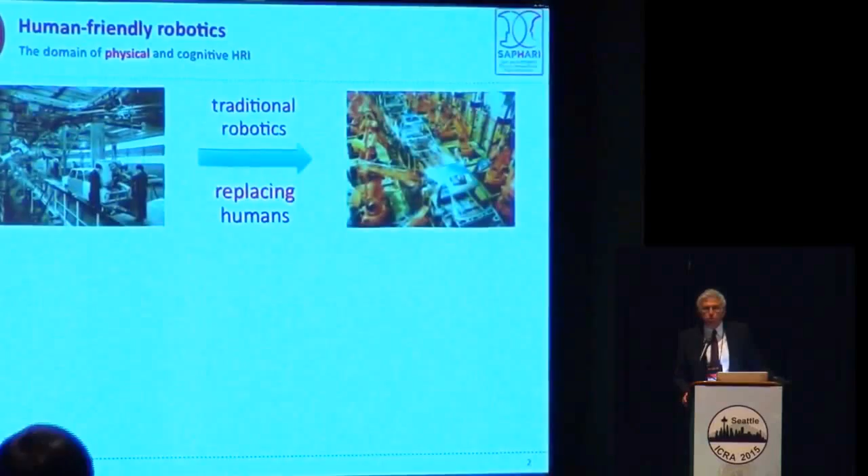So we want to move away from traditional robotics, that used to replace humans with robots, to the situation where humans and robots will collaborate. And this is going to happen, and it's happening already now, both in the industrial setting, so we talk about co-workers, and in homes, or in other service robotics applications, both professional and entertainment. So this is the context, and in particular, we are interested in the physical aspect of this human-robot interaction.

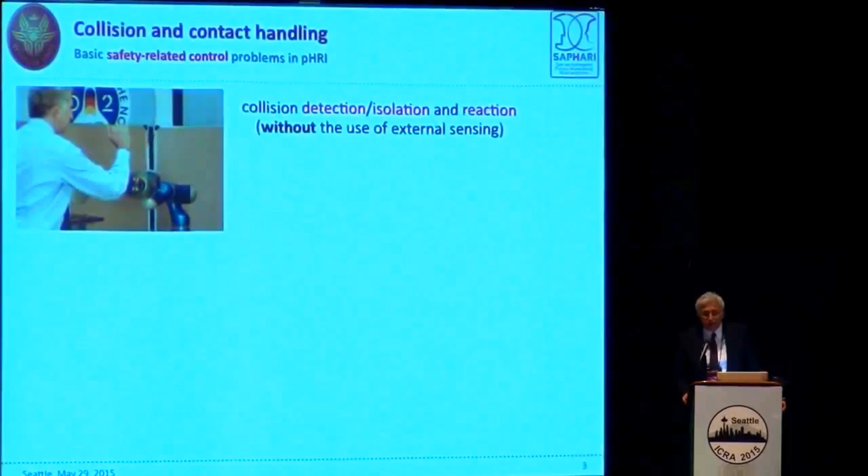Of course, the cognitive aspect is as important, maybe even more, but without the physical aspect, you won't go farther. So my background is in robot control, so I present here a few control problems which are safety related and which are important in human-robot interaction.

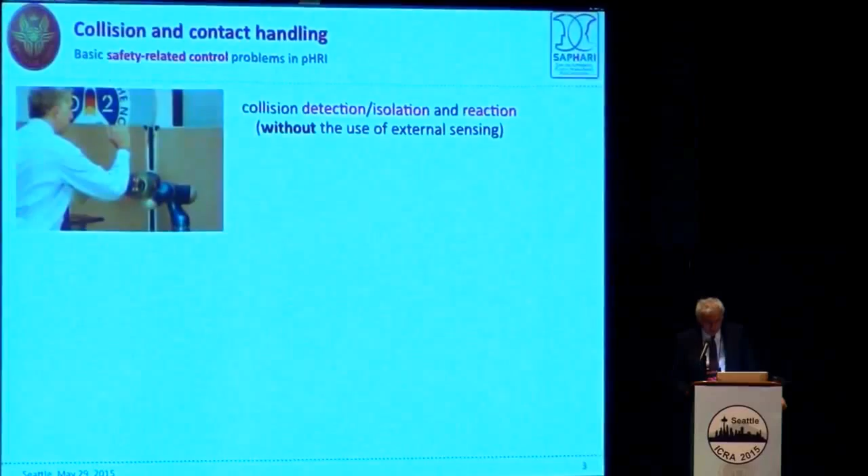In particular, the handling of contact, which may be harmful, so they become collision, and how do you detect collision, and how you isolate this collision, and what the robot should do in reaction to that. And possibly I will present some solutions that do not require any external sensing. They just can be implemented based on the robot's own proprioceptive sensing.

Of course, this is kind of the last event when a collision occurs, so you would like to have collision avoidance continuously, permanently, whatever the robot is doing, and this will allow the task to run despite the fact that the human entered the workspace.

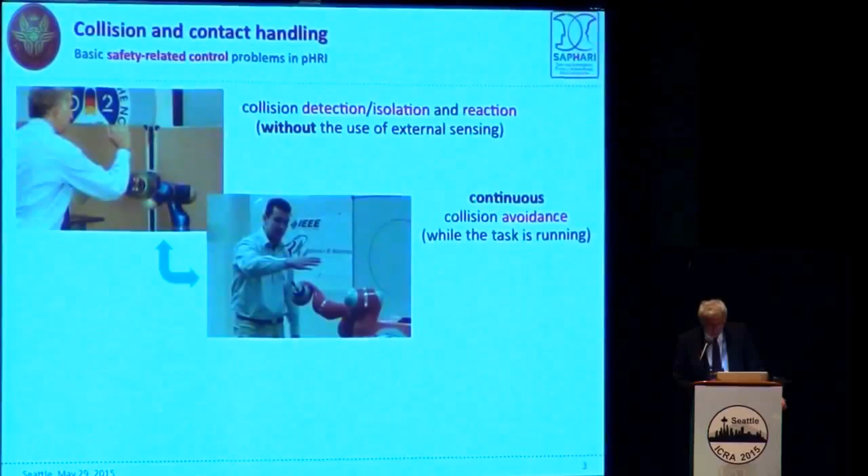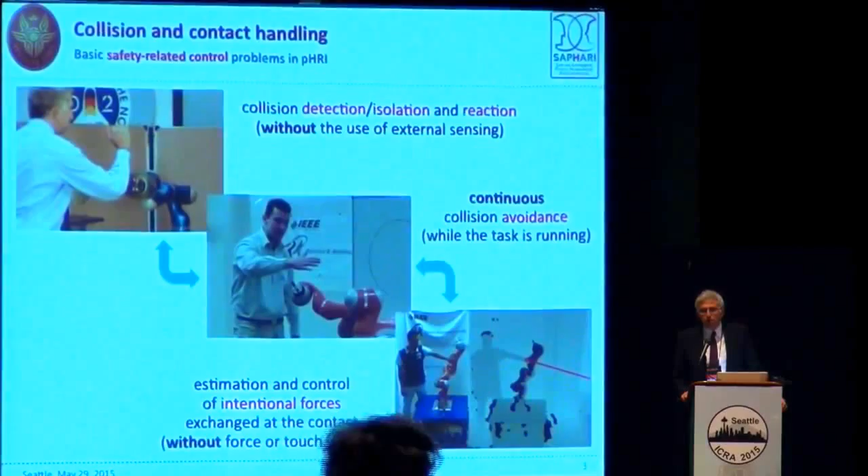There is another situation which is relevant, namely when this collision becomes intentional contact because human and robot would like to collaborate. So instead of escaping possible contact, the robot should look for contact with the human, understanding which parts should go into contact and how you handle this interaction at the physical level.

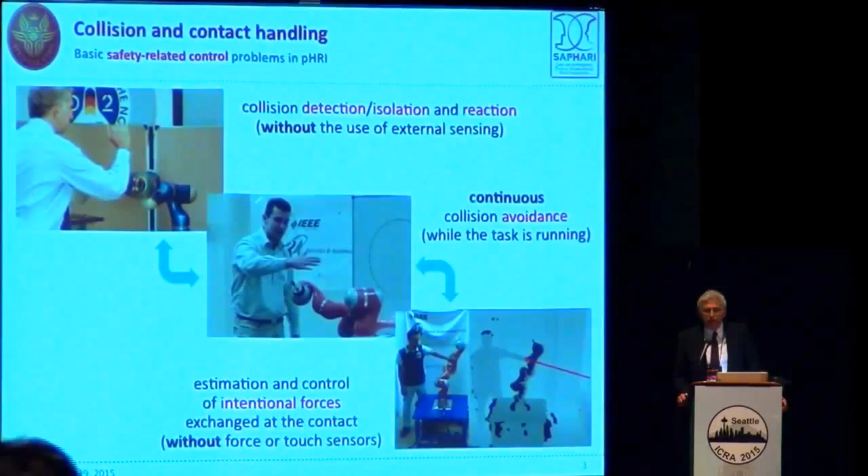And possibly, since this contact may occur at any place along the structure of the robot, like in whole arm manipulation, then you would like to rely not on a specific sensor like tactile sensor, proximity sensor, or force torque sensor, if possible.

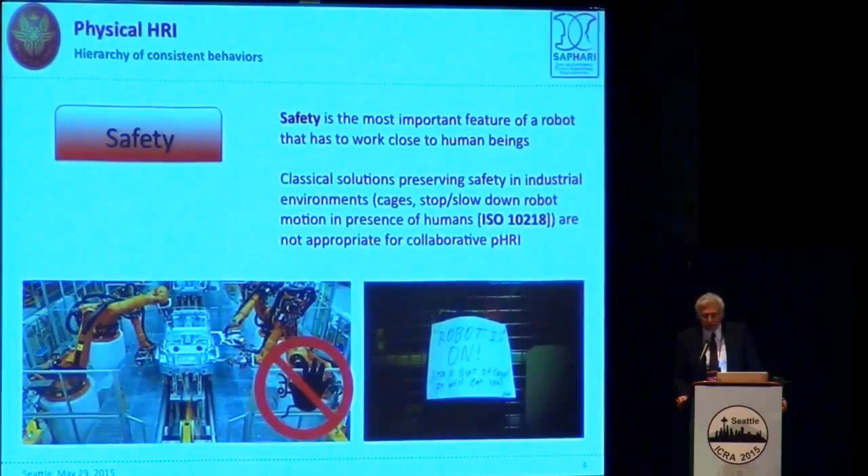So in this respect, these basic problems correspond to three layers of control architecture that we have been developing over the last three to four years. The lowest layer is safety, in the sense of physical contact, so detecting collision and reacting to collision. Of course, this includes mechanical redesign of the robot, which should be compliant, possibly at the joints, maybe with soft coverage, lightweight links, and all this mechanical part. From the control point of view, you build upon this mechanical and electronic advancement to design a safe strategy, and this is the lowest layer of our architecture.

Coexistence, we call coexistence the fact that the human and the robot are sharing their workspace. Of course, this is the most interesting part right now, but you don't have to forget about safety, because a coexistence without safety makes no sense. So safety is always present. On top of that, like in a subsumption architecture, you have these coexistence capabilities that you have to guarantee.

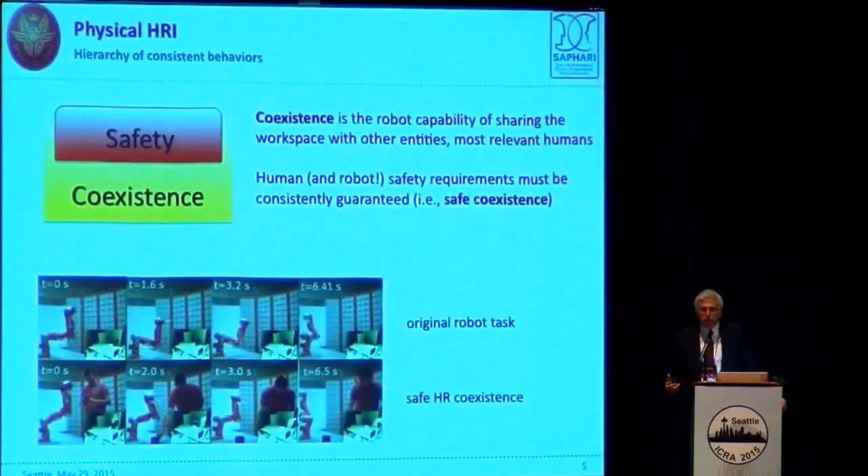Finally, collaboration. This is the highest level of this hierarchical control structure. You can collaborate in several ways. Of course, we are interested in collaboration which is physical, not contactless. Of course, you can exchange information with the robot by voice, by gesture, and so on, but even pushing in selected places the robot to let it change operation or task.

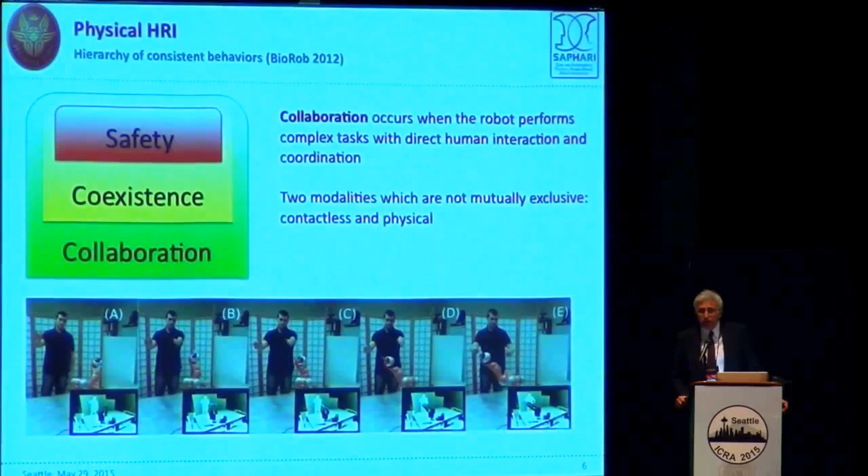And again, collaboration is important, but collaboration should coexist with the fact that other parts of the robot do not collide with the human, except for the selected arm or hand or whatever part of the human body. And if everything fails, the safety layer is also always there. So in this sense, I will present some solutions for each of these layers, and some examples through videos that show how they coordinate and what they represent in terms of robot behavior.

So suppose that we want to do collision handling. We start with planning a motion to prevent this collision. Then we execute the motion and use feedback to control and avoid, in real time, online collision. But if something fails, if the human is too fast for the robot or some unexpected motion occurs, you may collide, and so you want to detect collision. You have to distinguish if this is intentional or not, and in that case, you have to react or replan the structure.

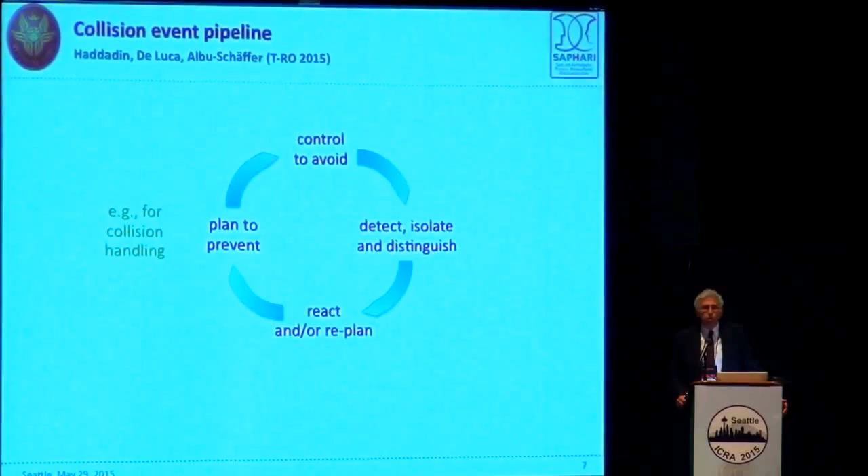So the following slide concerns this aspect. For the collision event, we developed, after a few years, a pipeline which goes from detecting a collision—saying yes or no, there is a collision or contact—to isolating a collision, which means locating the link where the collision has occurred, and possibly also the position of this contact point. Identification means reconstructing the joint torque which is caused by this collision, and eventually also the Cartesian force in this contact. This terminology comes from the literature on fault diagnosis, so it's fault detection, isolation, identification, and in fact our solution sees a collision like a fault occurring to our system.

And then you can also classify which type of contact it has been: accidental, intentional, or if it's severe. Of course, this metrology of collision is very important. And finally, react as fast as possible and in the most intelligent way.

The simplest reaction you can think of is to stop the robot, and in fact, in modern lightweight robots like KUKA or ABB or even Baxter, this is the standard reaction, actually the only reaction. In fact, in order to react in a different way, for instance to avoid that the robot collides with you and stops against your body, you would like to be more comfortable with the robot going away. In order to do this, you have to know which part of the robot has collided, so you need to have also isolation, and not just detection.

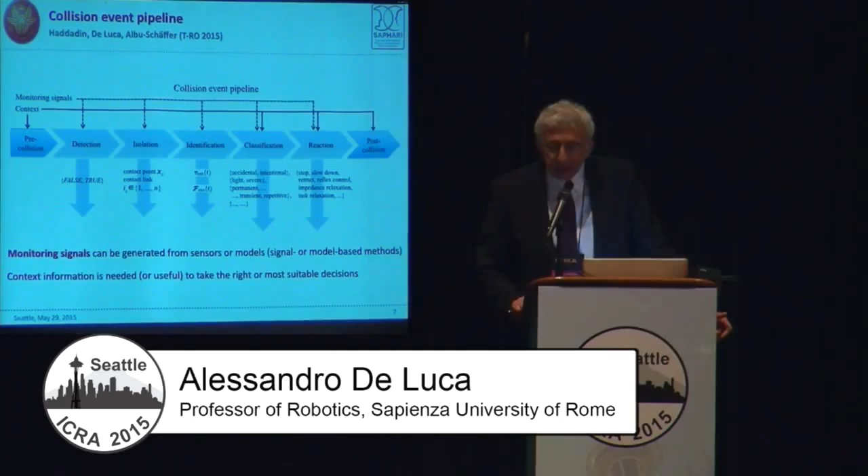For doing this task, we use monitoring signals. Most of them are physically motivated, like tracking the total energy or the momentum of the system. And of course, if you have additional context information, you may take the best decision to proceed after you have classified your type of contact.

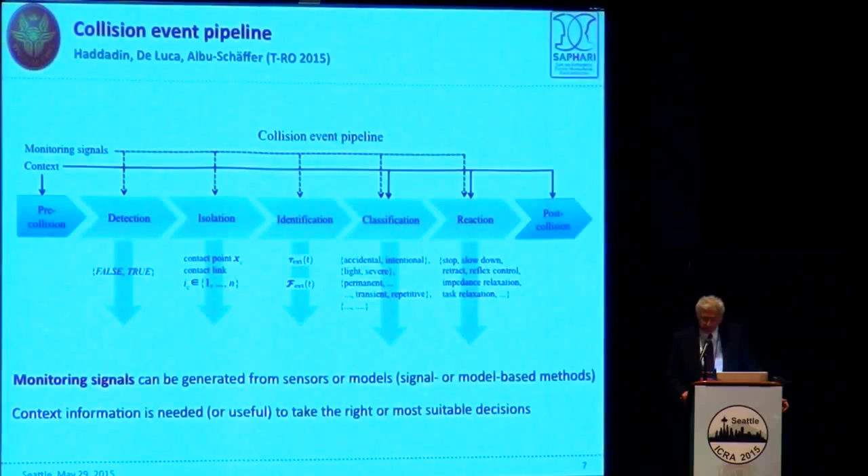So this is a general architecture where we monitor collision, and we may generate different monitoring signals, for instance a scalar signal sigma for detection, or a vector signal which has the same dimension as the joint space or command space of your robot. If one of these signals goes above some threshold, then you recognize that a collision has occurred. And of course, you would like to do this without external sensing or contact information.

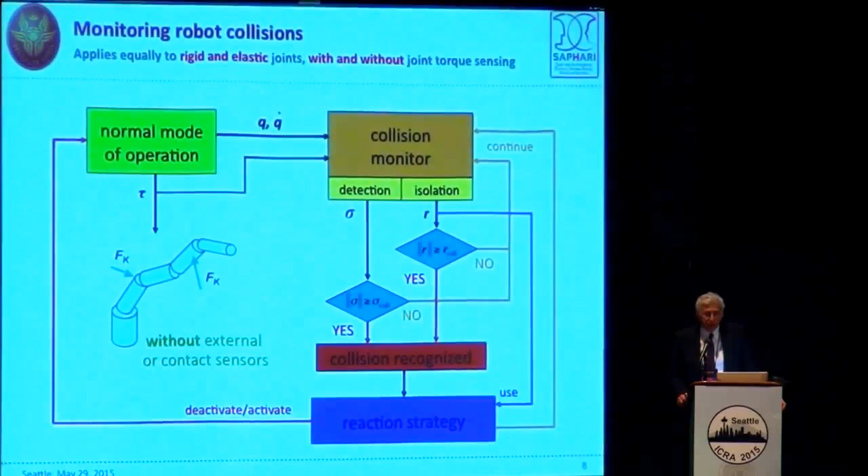Once you have recognized the collision, you want to react, so you deactivate whatever the robot was doing, and try to find some safe reactive motion. Of course, the nice thing about this structure is that the monitor is always on. So while you're reacting to a first collision, you're ready to detect even a further collision, and so on. So while in our analysis we consider one collision at a time, in fact we can handle multiple collisions, successive and so on.

So this is an application of this. I promise that this is the only slide with some equations. This is based on our method on vector residual, which applies both to rigid robots, where you don't have joint sensors, or robots which have compliance, even variable compliance joints - in case you have a joint sensor, you may take advantage of it. And this was the solution that we implemented back in 2005 and 2006 on the DLR lightweight robot while I was on sabbatical at Oberpfaffenhofen near Munich.

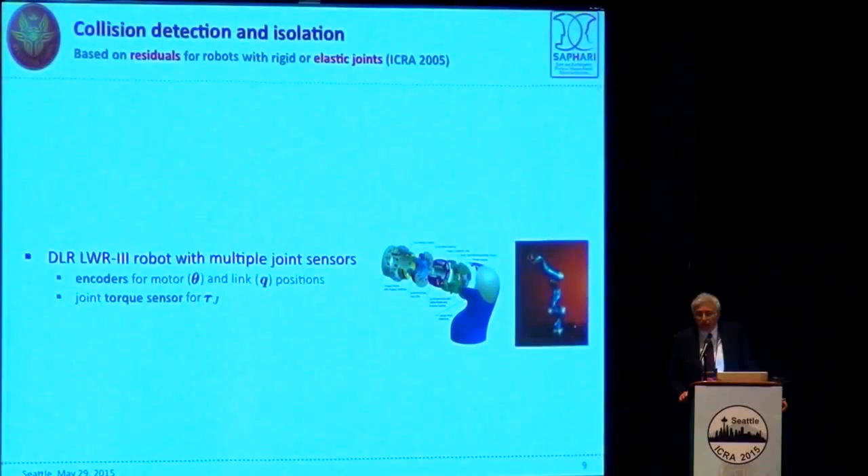So this arm has multiple sensing, in particular has a position measurement at the motor side and at the link side, and these two variables are different because of the harmonic drive used. And it has also a joint torque sensor. So with this redundant set of sensors, you can extract 2 out of the 3 pieces of information which are important.

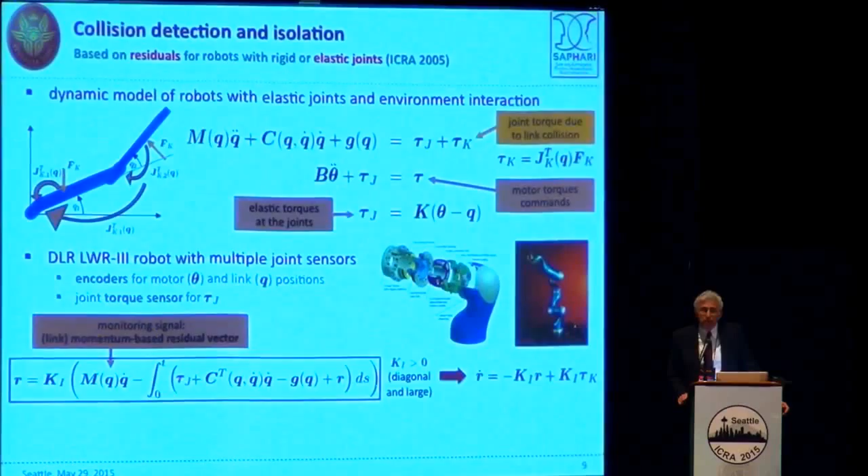It's an easy derivation to check that this R vector evolves like a first-order linear system, decoupled in components. And so it's 0 when there's no tau k. It grows like a first-order system responding to a step input. And as soon as tau k goes to 0, it returns to 0. So it has a nice filter property and a stability property.

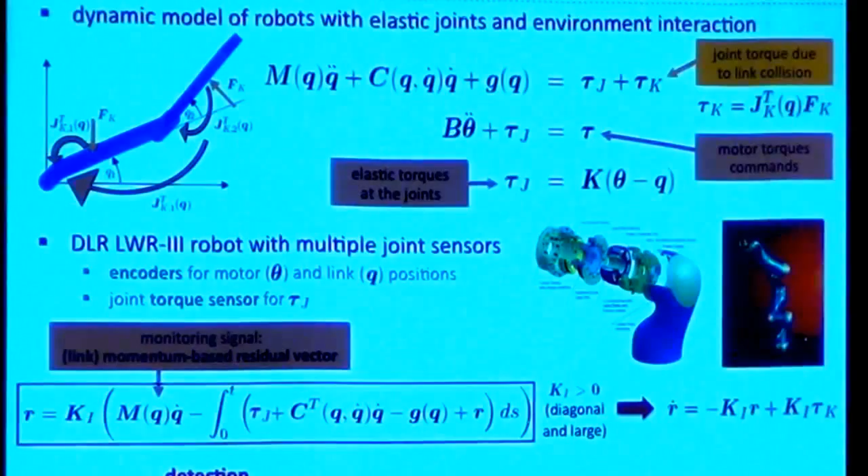So you can assume that if k is large enough, if this gain ki is large enough, then the residual vector is approximately equal to the joint torque resulting from a collision. And this gives you the detection capabilities. When one of these components, or the norm of this vector, is larger than a threshold, then you detect collision.

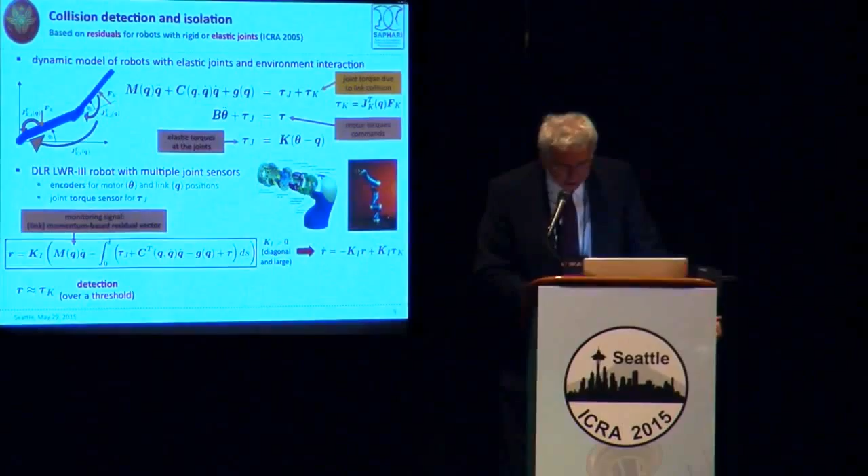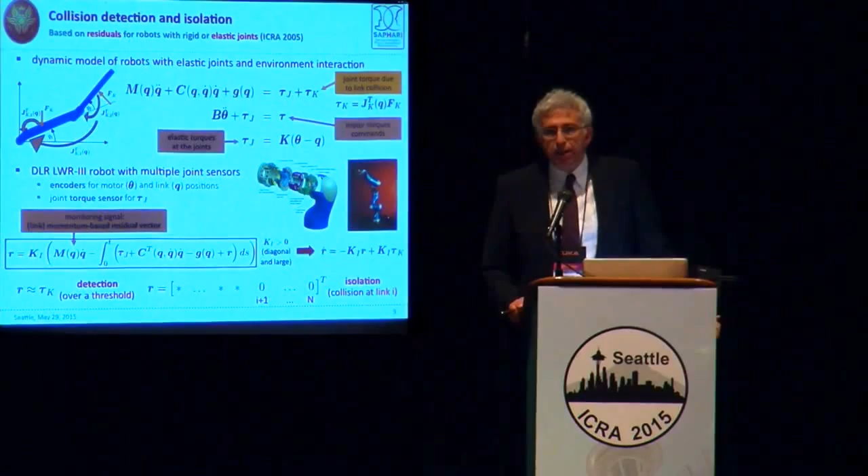The isolation properties come from a more detailed analysis, which I don't have time for, but essentially this vector has structural zeros beyond the link that has collided. So by looking at the evolution of this vector, those components which are 0 remain 0. Then you can say that link i, in this case, has collided, and this gives the isolation properties.

For instance, this is an experiment conducted on the lightweight robot where a collision at link 4 occurs. We were moving only 3 out of the 7 joints of this robot. And you can see that the robot stops here.

This is the motion, this is position and velocity. There is some transient depending on the reaction that you have.

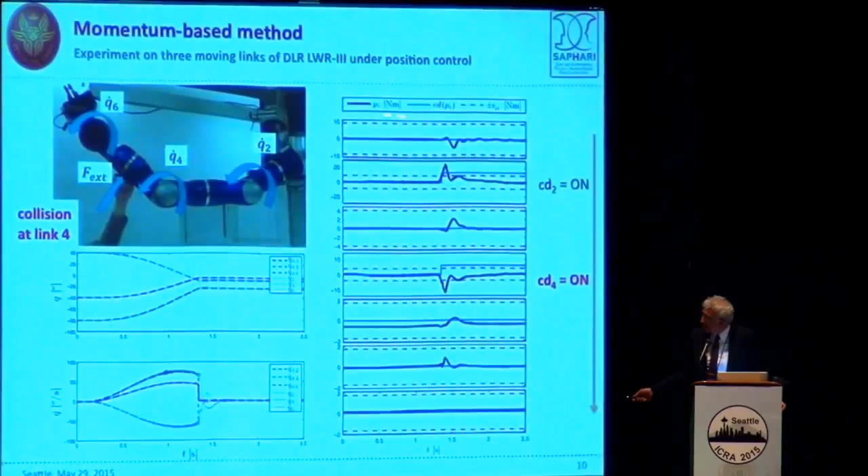If you look at the evolution of the residual, the red dashed lines are the thresholds, which have been tuned according to the noise and residual uncertainty in the dynamics. You see that you have a detection, these blue lines on joint 2, nothing on joint 3, something on joint 4, and then 5, 6, and 7 are 0. So the largest index that has a non-zero signal detected qualifies the colliding link, in this case, a collision at link 4.

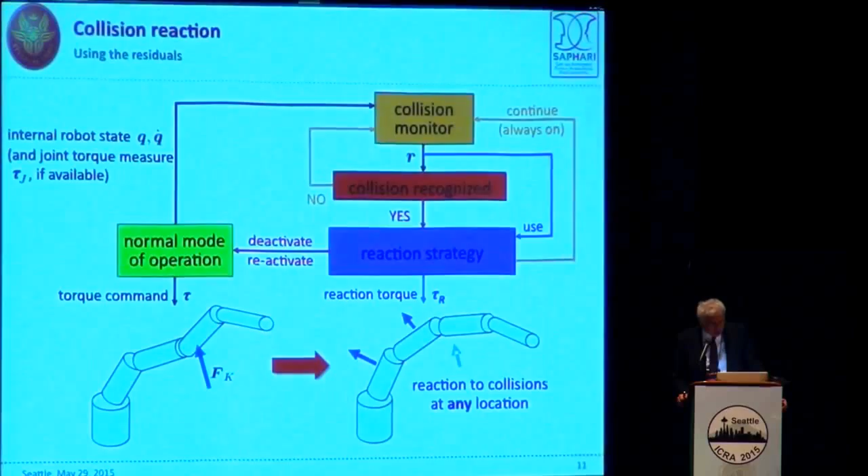So what do you do then? You start to do reaction, and reaction means trying to bring the robot away from the collision area. The simplest reaction is just to stop, but we developed a portfolio of strategies for doing this reaction, and here you can see different ways.

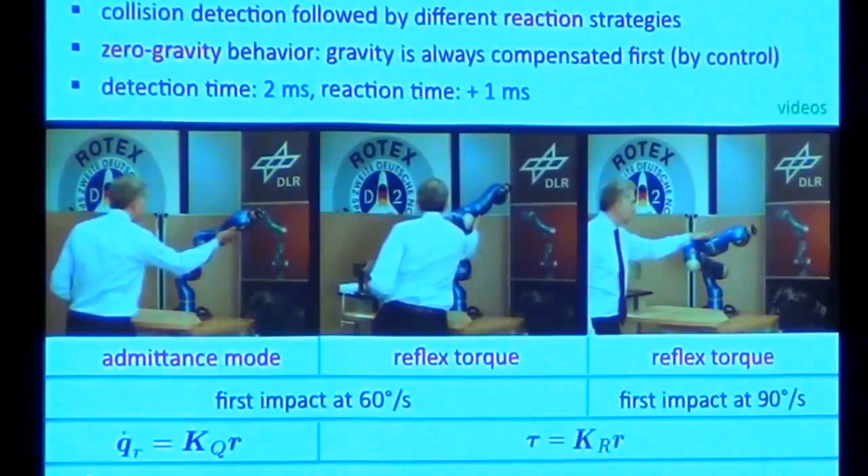So R is the residual vector, and you can see in this first video that we are generating a reference motion for the robot proportional to the residual. Remember that the residual goes to 0 when the collision is over, and as fast as an exponential.

Here we have another scheme, which is a reflex torque. So the reactive torque is again proportional to the residual.

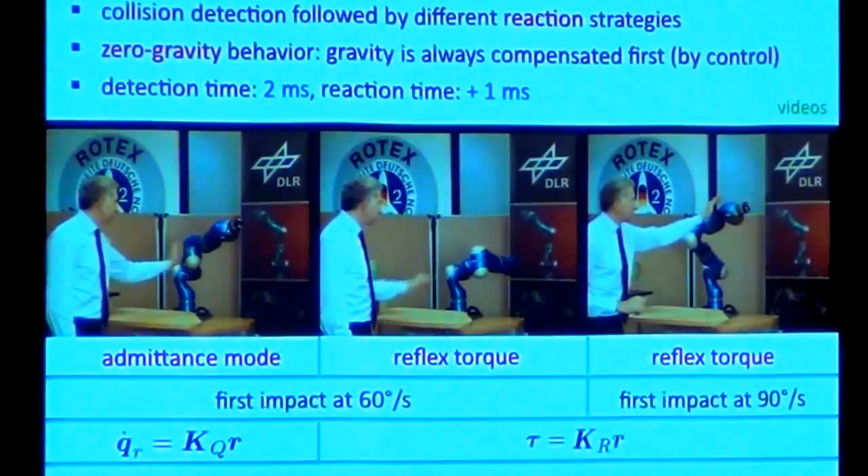And you can have, once the robot has been stopped after the first collision, it remains in a floating state, and when you go against the robot and push it at any point, it flows in different ways, smoother or with more jerky motion, like in the admittance mode that you can see on the left.

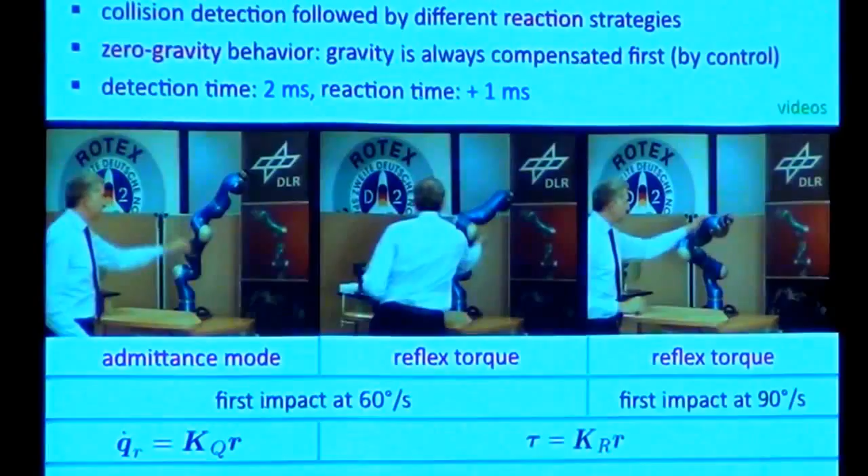So this is a whole set of possibilities. In particular, you can also try to preserve the original task, for instance using redundancy. So if you have a Cartesian task, let's say a 3-dimensional task, and you have a collision, you can accommodate the reaction torque to this collision in the null space of some dynamic matrix so that you try to preserve the execution of the Cartesian task.

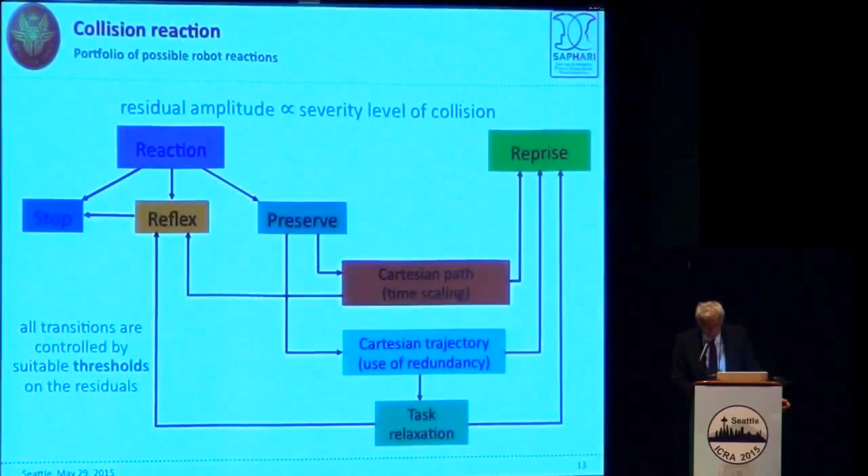So you can imagine several strategies. You have the bricks, and you can build upon these bricks reactive strategies.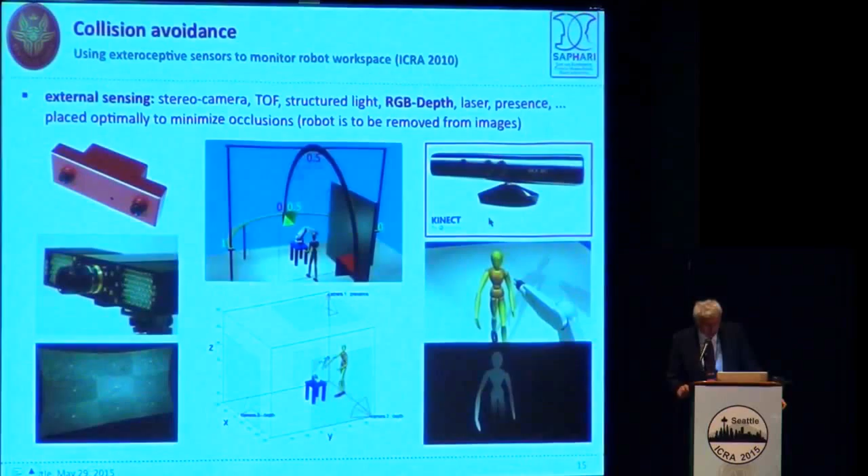Okay, so what about the second level, coexistence? We would like to avoid collision as much as possible in this context. Of course, you have to put sensors in your environment, on the robot, or in the fixed environment, and there are multiple choices you can make. You can also formulate an optimization problem to minimize the obscured area to the sensor, depending on the probability of motion of the human around the robot.

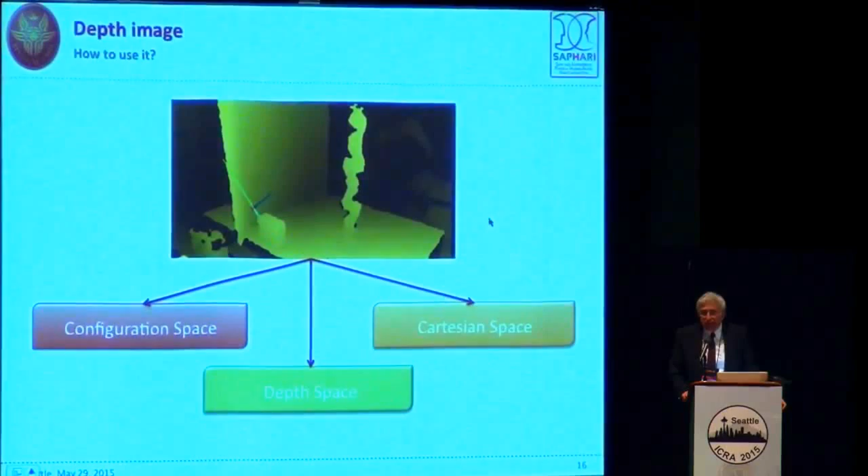We use Kinect, like many people lately, and you can use Kinect in several ways. For instance, you can typically use the point cloud library, bringing your information directly into Cartesian space if you want to reconstruct objects. We don't want to reconstruct objects, we want just to measure the distance between the robot and the human, both moving, okay? So we found that the most efficient solution is to work in the depth space.

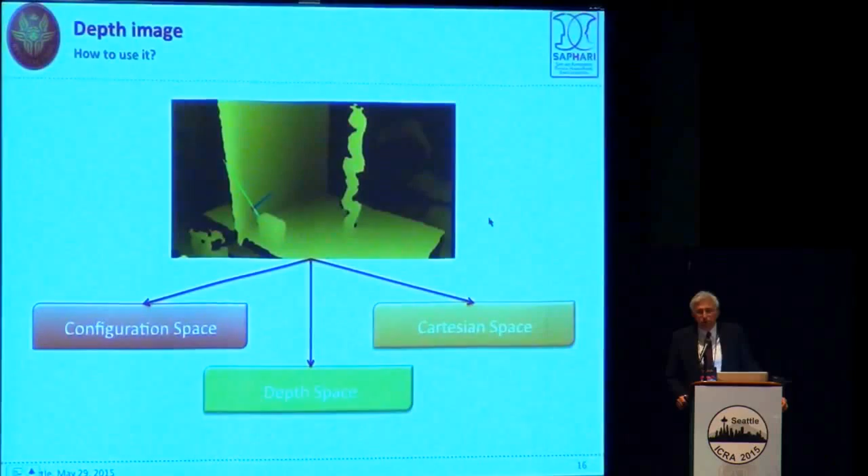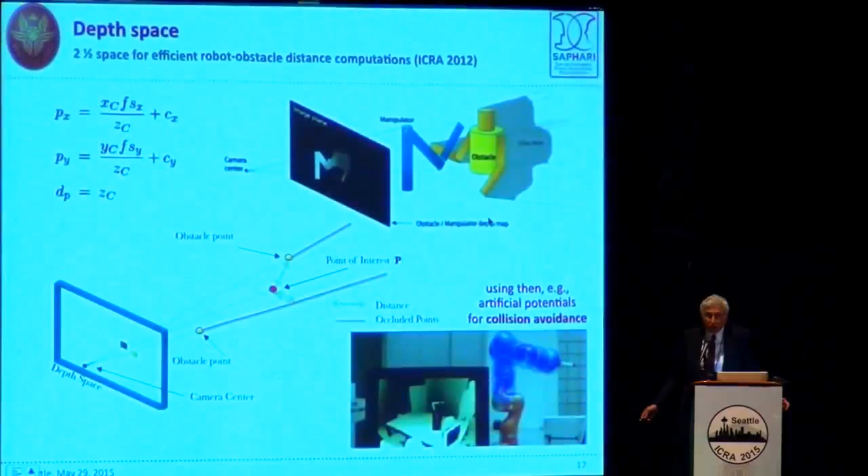In the depth space, you have information that you can process such that the computation of the distance of an obstacle point, like this one or this one, from a point of interest, one of the control points that we choose on the robot, can be done efficiently directly in the sensor space. This includes the fact that this distance is the closest distance not to the obstacle point itself, but to the covered shadow of this obstacle point. So you are conservative in a sense, but this is very easy to compute in real time, and we can run things at 200 Hertz or so.

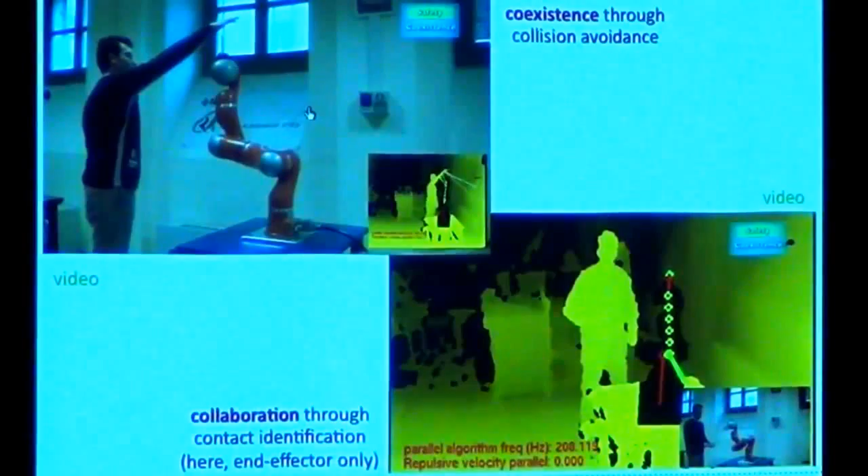So if you put together this idea, you have this type of behavior with Fabrizio Flacco, our postdoc, with a lightweight robot moving, doing a pre-planned task, but as soon as he gets closer the robot escapes based on this computation of distances and on some local strategy, artificial potential, vortex field.

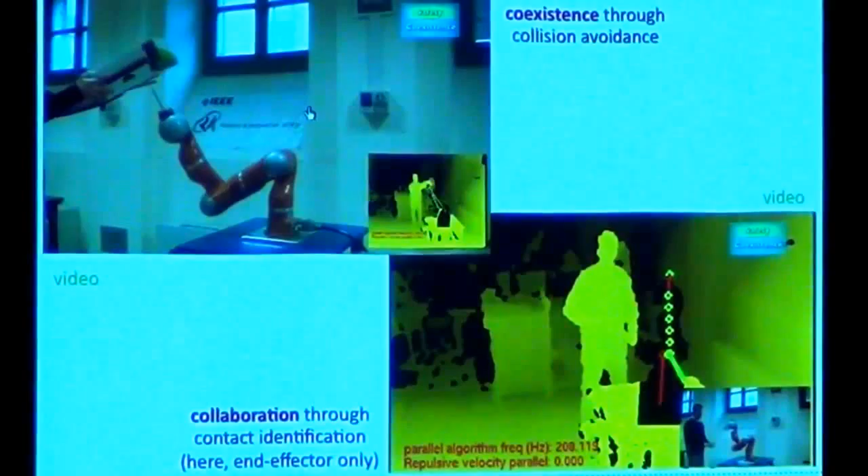You can implement whatever you wish once you have this minimum distance information. And of course, you can also have multiple objects, not only human. The robot is avoiding everything.

And in case you start the collaboration phase, in this case, the collaboration starts, but the video... no, it starts again. Sorry. Okay.

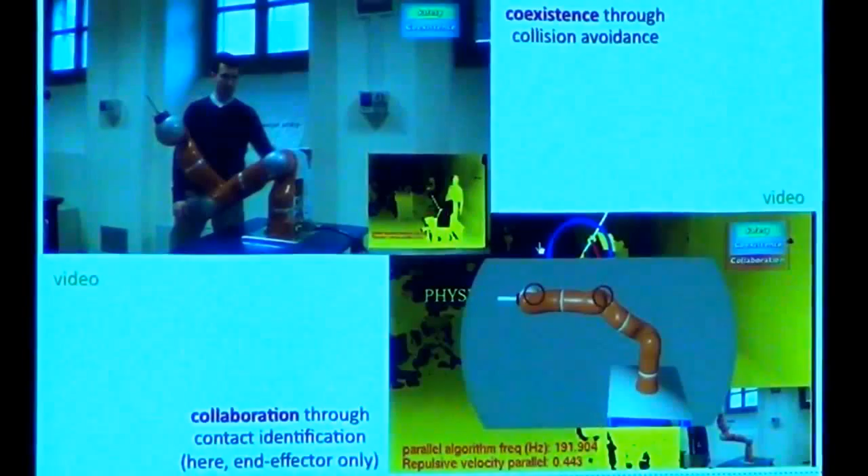Just by a gesture, a hand waving, you implement our method for reconstructing the contact force. At this level, the robot follows the hand that was waved, in the sense that this is the target, and you have an exchange of forces at the contact level, in this case only at the end effector level. Only the designated hand should be reached, while all the rest should be avoided. This is the coexistence condition.

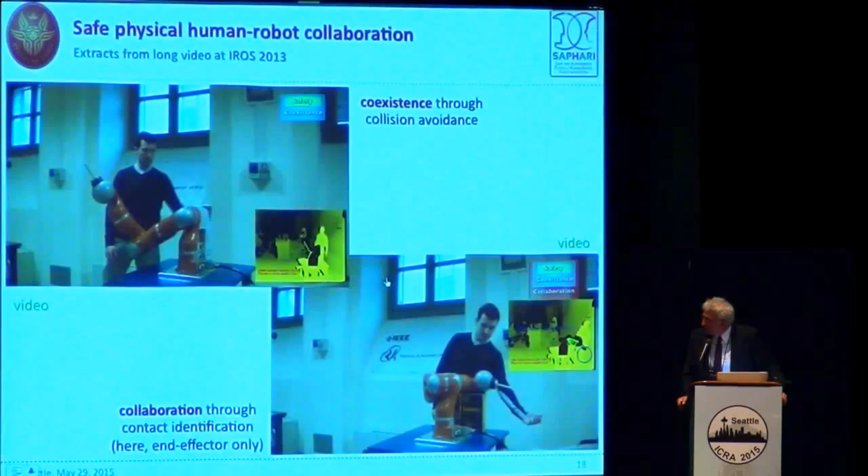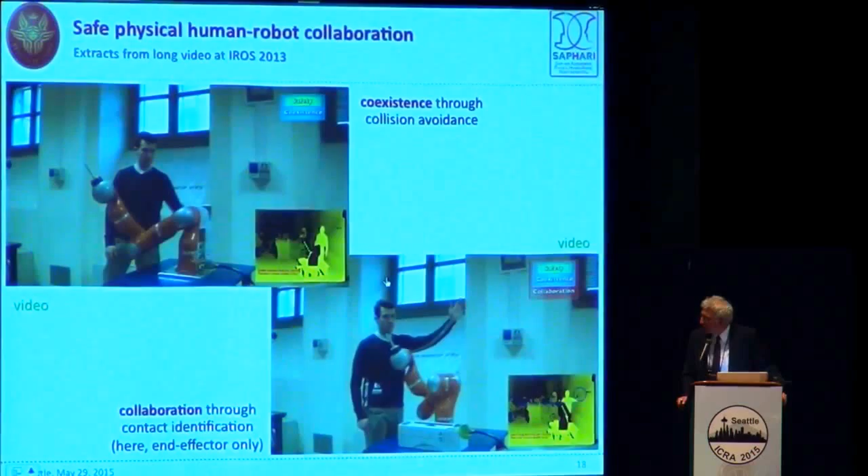The final part of this short video is interesting because Fabrizio, while holding the end effector, is pushing it against his body. The more you get close to the rest of the body, the harder it is for him to move the robot, because coexistence is more important than collaboration.

In case there would be a collision, the reactive part starts, so the lower level of safety is involved. Now, how do you distinguish between a collision and collaboration?

You can use the same method, the residual, and have two filters with two bandwidths. You allocate to the filter with the largest bandwidth the presence of hard collision, which are associated to unintentional contacts. A lower bandwidth filter on the residual, with a simple logic built upon, can tell you that the collision is not as hard, it's a soft collision, and you can interpret this as the intention to collaborate.

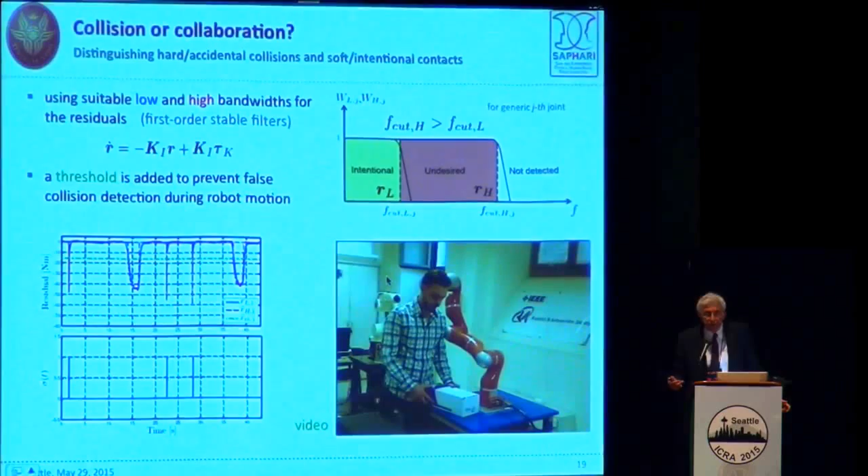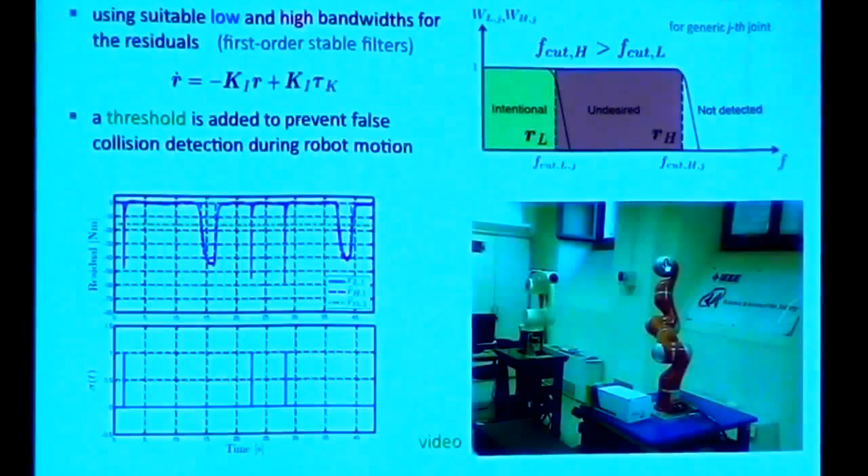For instance, in this video, Emanuele Magrini, who is also the author of the paper selected as finalist, is showing an example where you collide, and the robot will stop, and after a while will resume its operation.

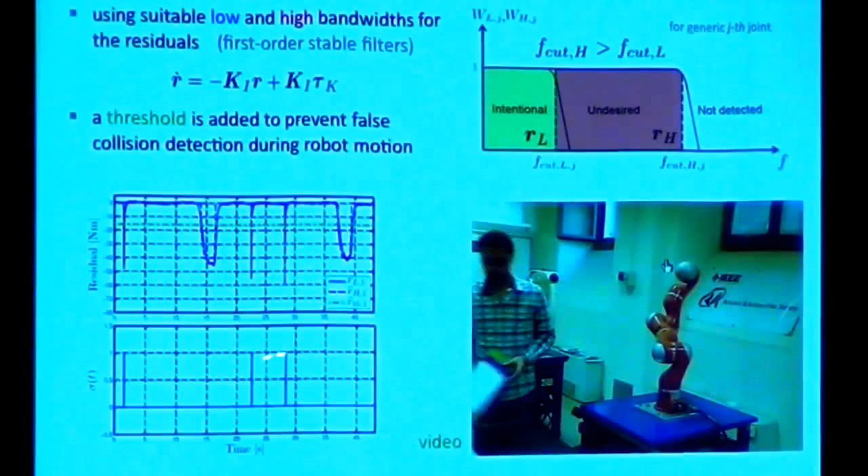In some cases where the two residuals behave in a different way, then you have a detection of soft collision. So again, this was a hard collision. Now the third one, and you can see how Emanuele is stopping the robot in the third case.

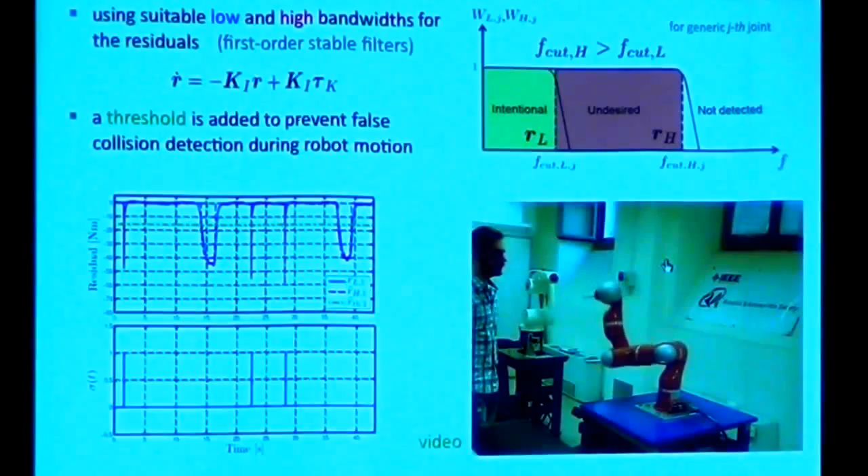Now the robot is not stopping, it's ready to collaborate, so he can push it around. Here there's an admittance mode control implemented.

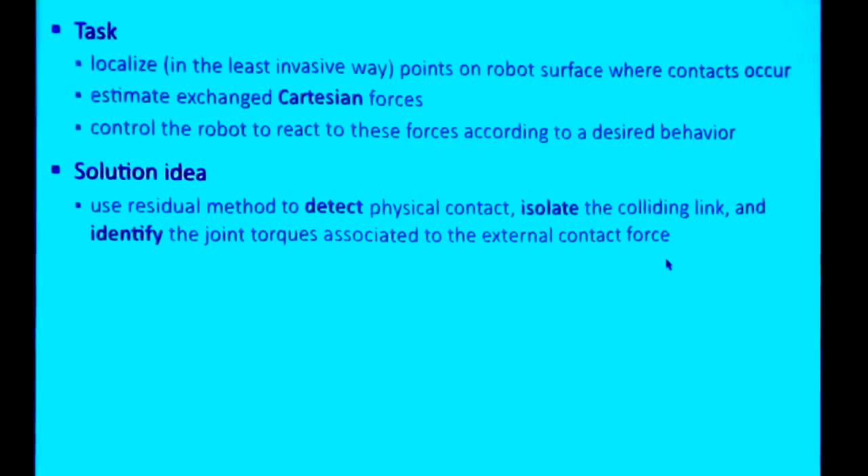Once you have done this, we can really estimate the contact force, and in order to do this, in general, we need to have an external sensor that localizes the contact point. We have anyway an external sensor for guaranteeing coexistence. We use one or two Kinect sensors in our lab.

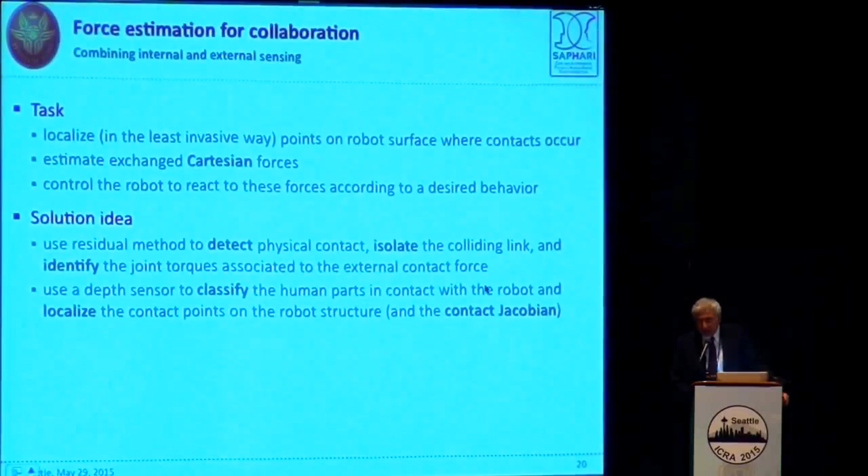By combining these two pieces of information, the internal information coming from the residual and the external information coming from the Kinect, which allows you to compute the closest point of the human to the robot, you can localize the contact point, so you can localize the Jacobian associated to the contact, and then set up a simple equation where you replace the actual joint torque with the residual, and solve this with a least square approach, for instance a pseudo-inverse, and you can extract the Cartesian force.

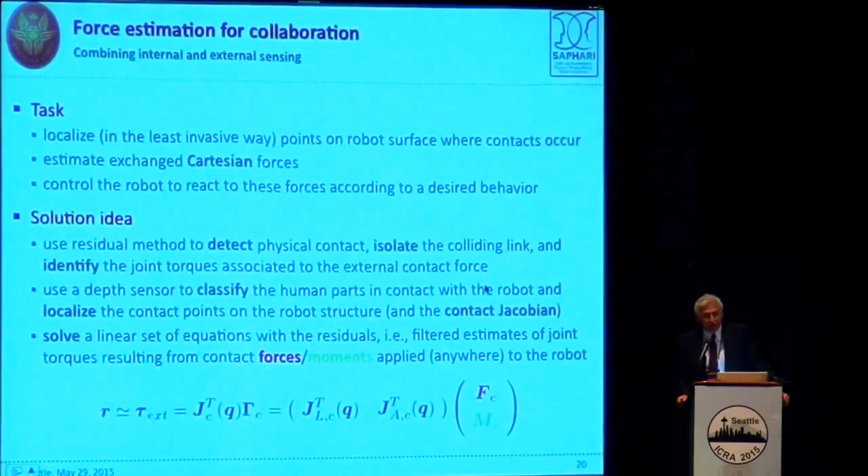So this is just to give you an idea of what happens. We process the data, we remove the robot from the depth image. We have a CAD model of the surface of the robot, and so while monitoring, when the residual goes high, we just track the closest point on the surface of the robot and qualify this as the contact point.

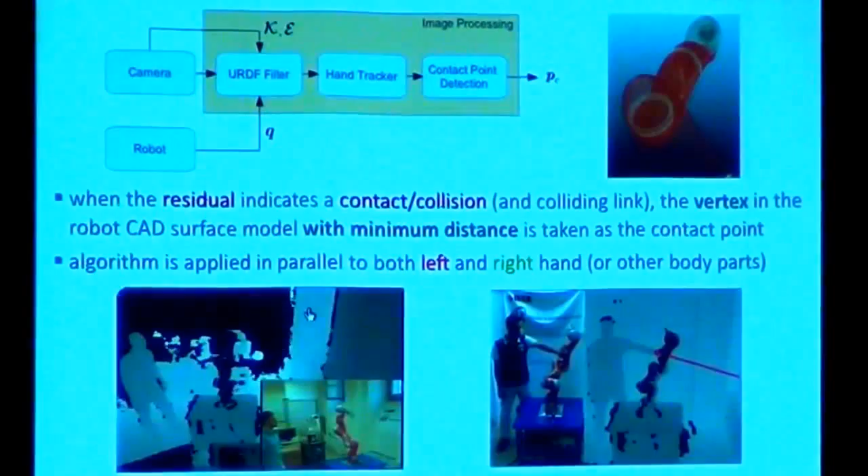And from there, you can estimate the contact force in direction and intensity. I will skip this. This is just a validation of how... sorry. So this is the behavior.

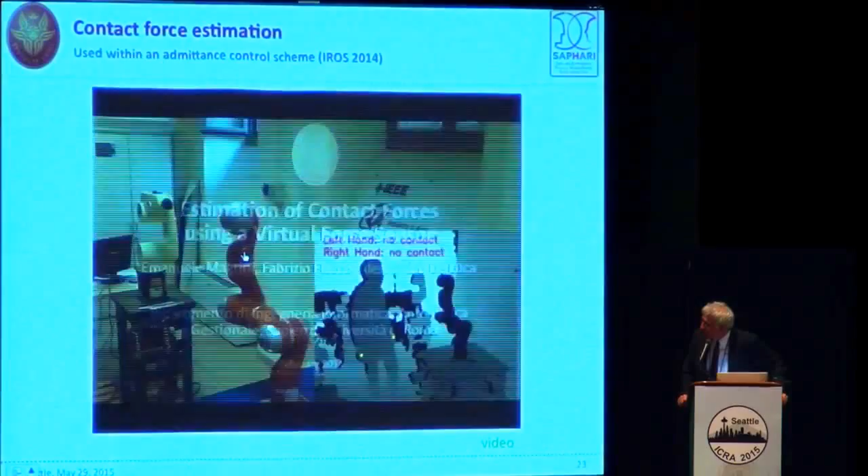This is a video from IROS 2014. Again, you see the two dots, which are the hands being tracked, and Emanuele can touch the robot at any place with the right or left hand, and this arrow that you see is the online estimation of the contact force.

By the way, you could do this also while the robot was moving, but then it's hard to show things. So the robot is kept in a rest position and then reacts accordingly.

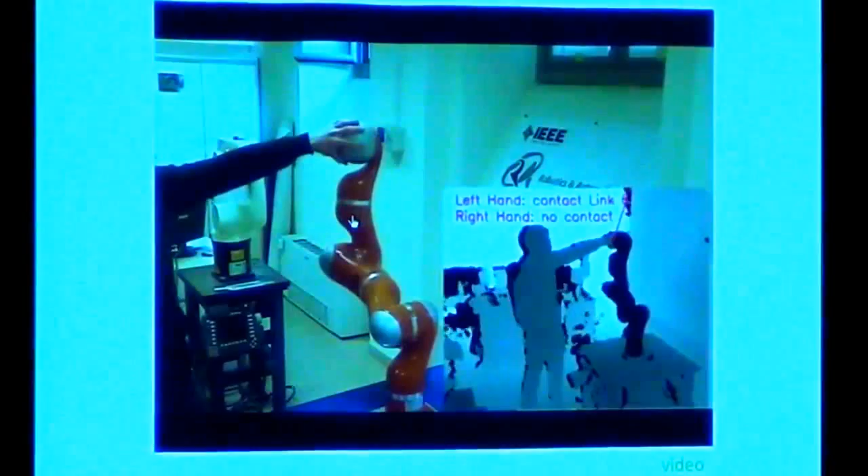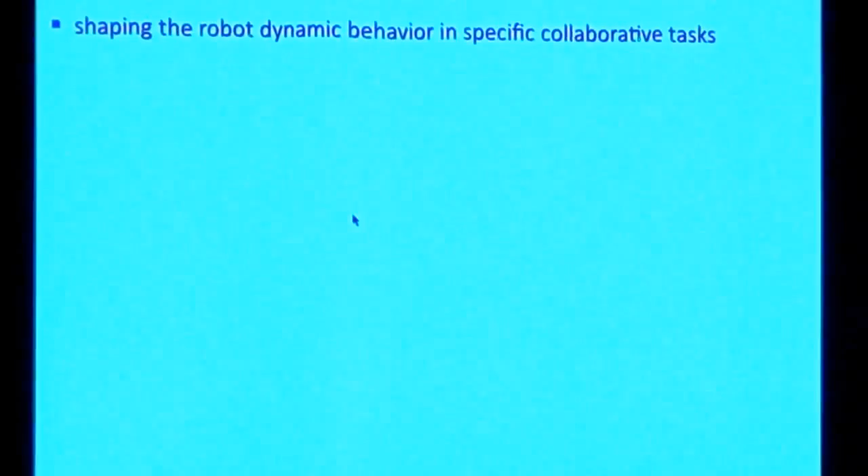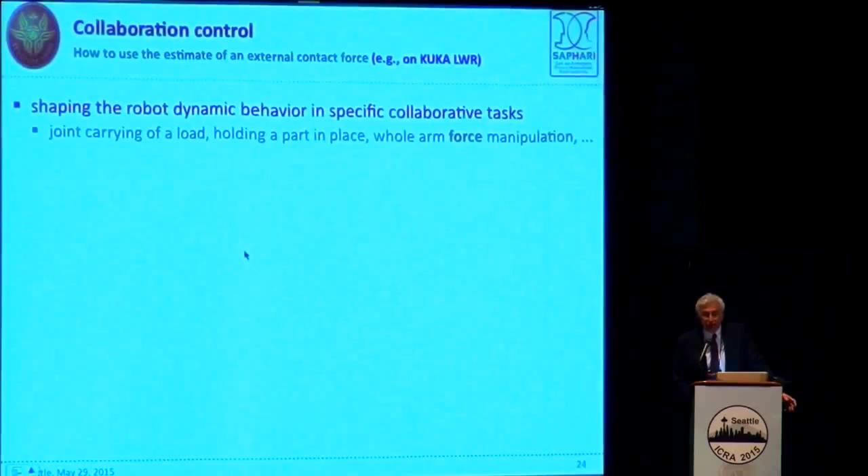This is working, and in fact you can estimate also double contact as long as this occurs on two different links. With this information, you can shape some robot reaction for collaboration, not for escaping from the contact, because you have recognized that you want to have this contact. For instance, you want to do joint carrying of a load or holding a part in place, and this could happen at any point along the structure, so this is a kind of whole arm force manipulation.

We have implemented different schemes. With reference to the KUKA lightweight robot and the fast research interface, the admittance control law can be implemented in the velocity or position mode, while impedance and force control laws need the torque mode.

These have been implemented at the contact level. Once you recognize the contact, you can design an impedance controller or an explicit direct force controller at that contact point. In this sense, it's a generalization of what we study in textbooks, joint impedance or end effector impedance. You can realize a controller which realizes impedance at the contact point, whatever that contact point is.

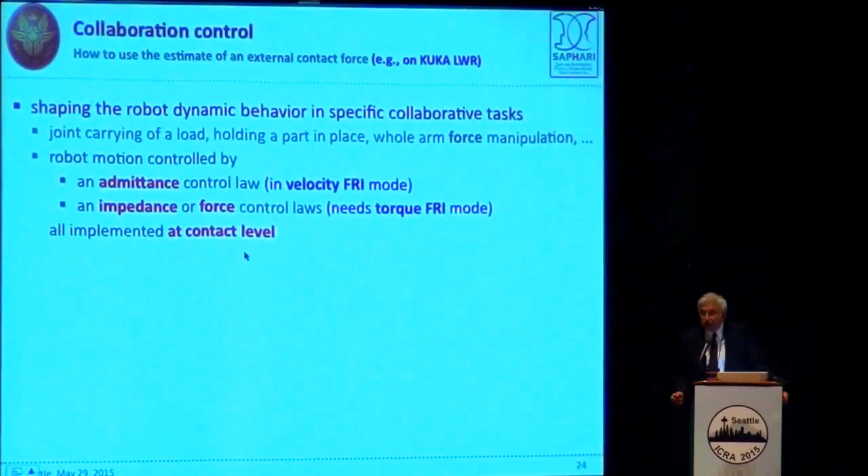This summarizes for the impedance case what we are doing. This is a joint compliance scheme. You have a contact force here, some compliance at the joints, and this is how you realize things. Of course, you can have a Cartesian compliance, a contact force at any point, and some reference position at the end effector level, and the robot reacts to these external forces without sensing force at all.

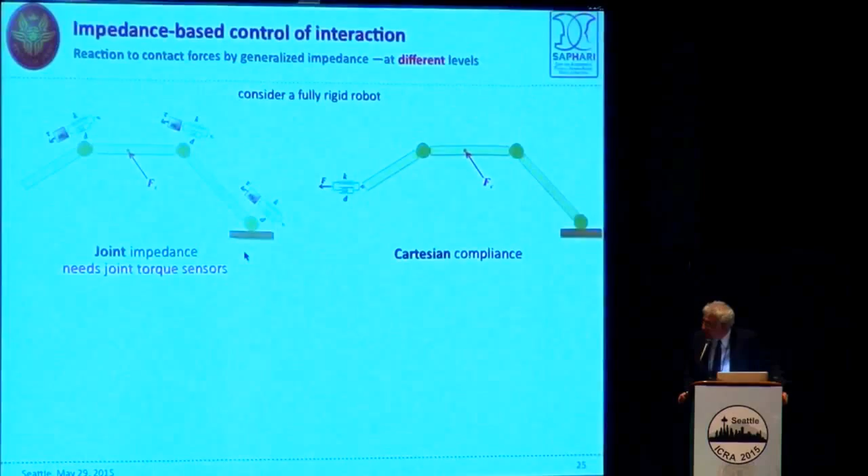But if you want to do impedance, in particular you want to modify the apparent inertia at the joints, you need some joint torque sensor. Similarly, if you want to realize Cartesian impedance, you typically need a force torque sensor. So if you want to modify the apparent inertia, whatever it is, you need to measure force or have an estimate of force.

In fact, this is what we do. At a generic point, we can modify the impedance, so we can assign a desired mass spring damper at this point and react to whatever contact force is there. In order to do this, we don't measure, but we use our estimate of this contact force.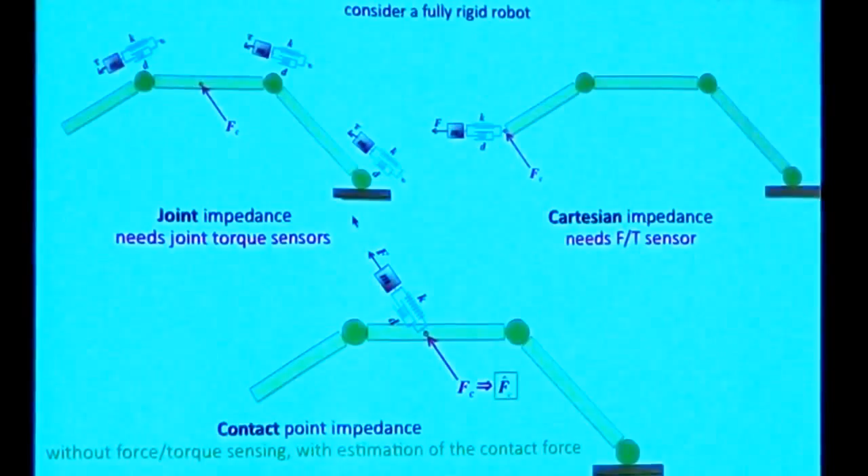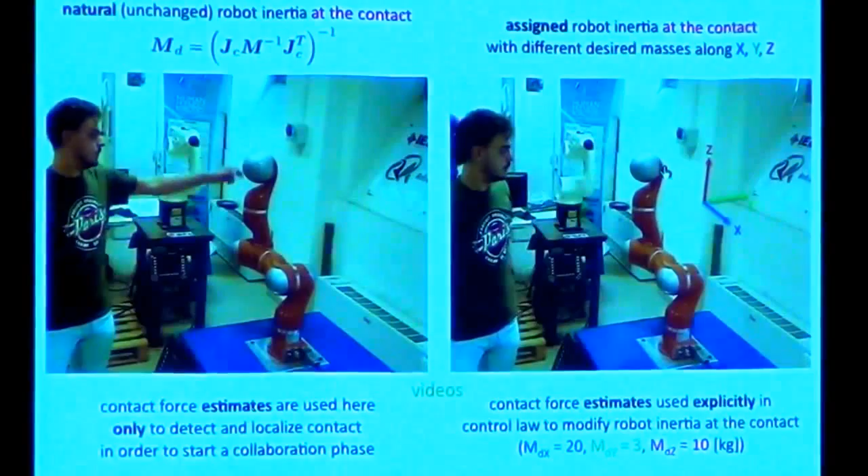To implement our controller, here you can see two situations in parallel. The first where we don't change the inertia, so in fact we don't need an estimate of the force for this — we just need this to locate where the contact occurs.

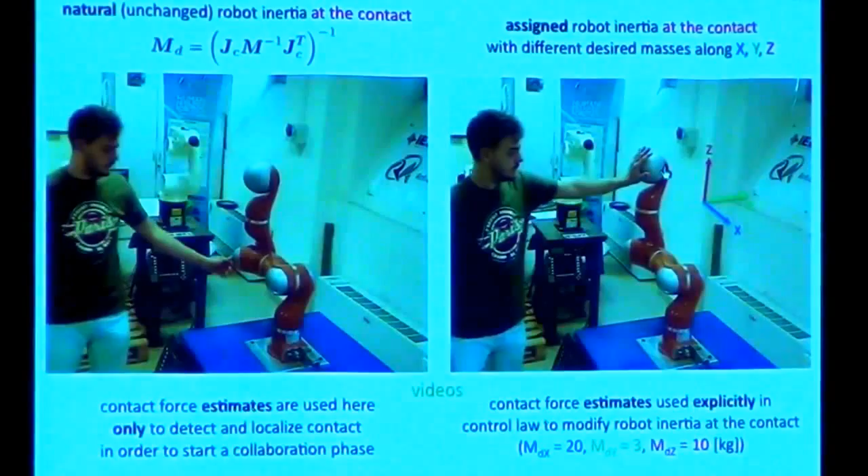In the right video, instead, we are modifying the inertia. We can modify, of course, the stiffness or the damping, but here we decided just to modify the mass, and you can see that the transient is different in the various directions. The last part, and I'm almost done, concerns force regulation.

Now, when you want to control force, you need to measure force, of course. This is obvious. Since you don't have a measure of the force, you use the estimate as a proxy of this force. Here you can tell there's a regulation to 15 Newton.

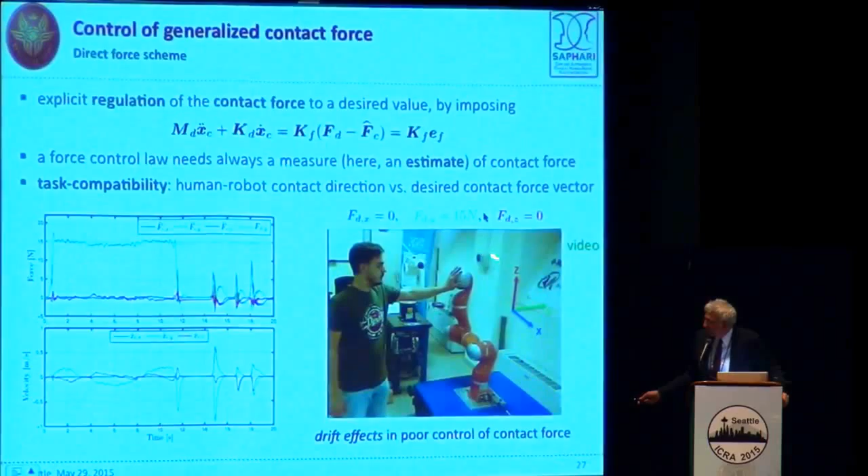So you decide a direction for the desired force, and then you implement this kind of direct force controller. But what happens in this case? When you push in the direction where you have commanded some desired force, the robot moves back if you're pushing too hard, or comes against you if you're pushing too soft, okay?

But if you're pushing in a direction you're not expecting to react with 15 Newton, of course it will drift away, okay? Because you have a problem of inconsistency of the task between the human and the robot. It's exactly the same story that happened in the old time with hybrid force-velocity control and end effector being involved in contact with the geometry of the environment.

If you're trying to apply a force in a direction where the environment is not capable of providing a reaction force, then you will accelerate in that direction. And this is the same thing that happens here. So what is the solution?

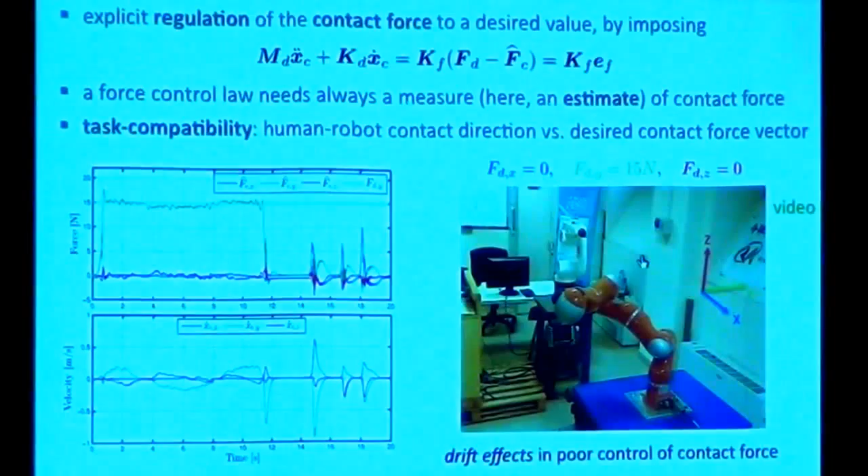It's very simple. Instead of arbitrarily assigning a force in Cartesian space, you assign just a scalar value along the identified direction. So you have an estimated direction of the force and an estimated value, and you modify your control action so that this value goes to the desired set point.

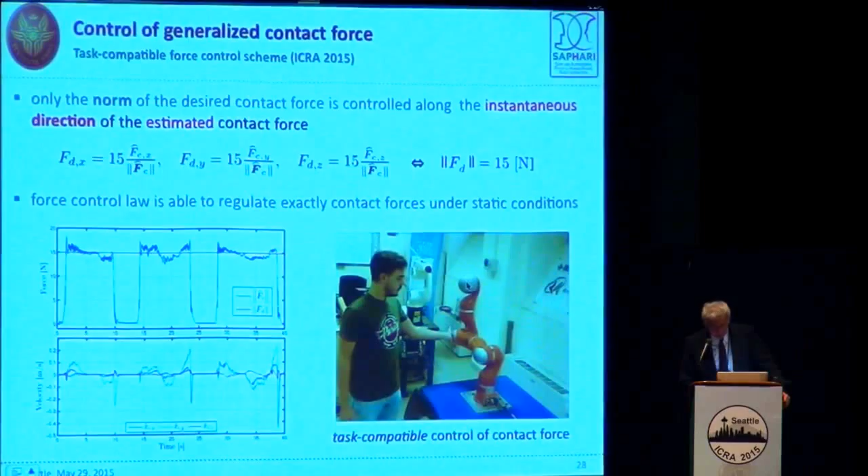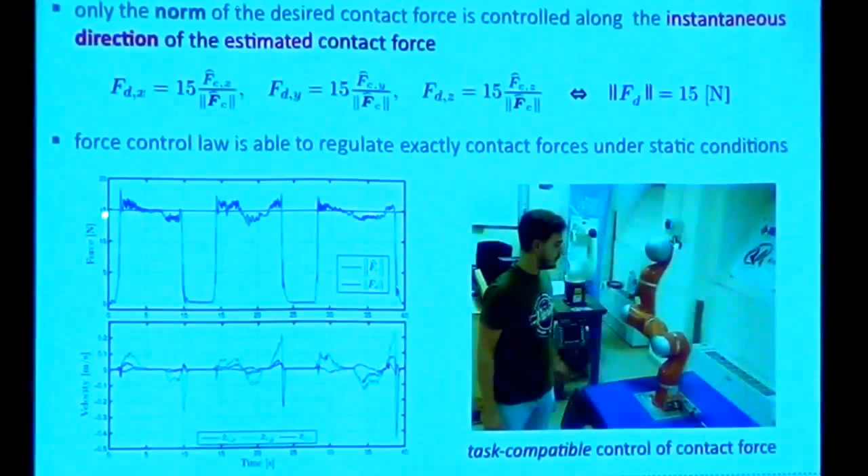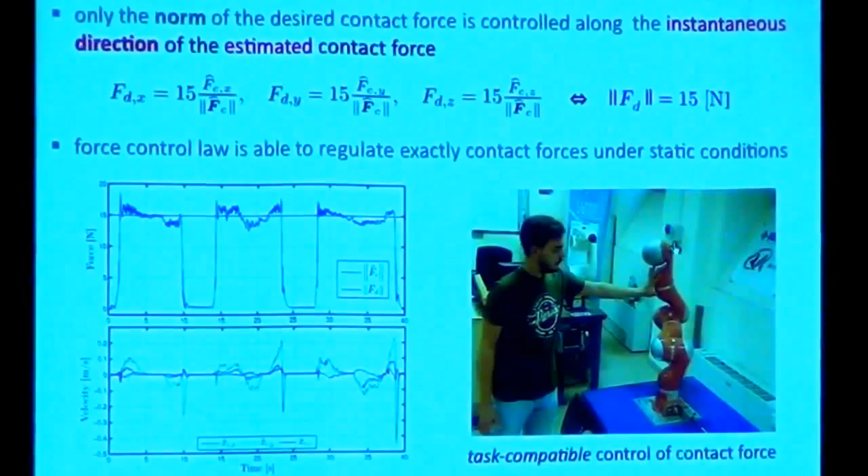In this case, again, 15 newtons, and you can see that Emanuele is pushing the robot in different directions, at different points, and this video roughly corresponds to the force going to regulation, then going to zero, then pushing again here, and then back to zero, and so on. No matter where you touch the robot or in which direction, you don't have this drift effect. So this is the good implementation of the basic idea.

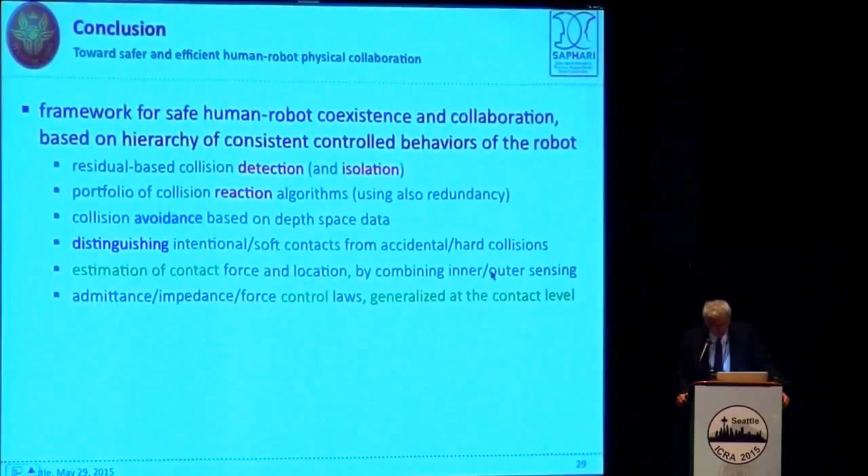So, summarizing, I have presented some samples of multi-year work on safe human-robot architecture, going from detection to isolation to reaction. I hope I was able to convey the difference between detection and isolation, and the fact that there are more reactions than just stopping the robot. Collision avoidance is another layer.

We have shown the possibility of distinguishing between intentional contact and accidental or hard collision. And then the idea of estimating, sensorless, in a generic sense, the contact force is useful because this can be applied to any point of the robot, and you can then close basic control schemes. Of course, you have to combine this in order to realize some collaboration—that's another story. These are the tools you have available to build up more sophisticated global behavior.

And I conclude by acknowledging the contribution of many people, in particular Fabrizio Flacco, Emanuele Magrini, Milad Geravand, a master's student of mine, who was able to implement a poor man's version of all this idea on a conventional industrial robot without having any information of the dynamic model, the internal torque, or whatever. But still it works reasonably.

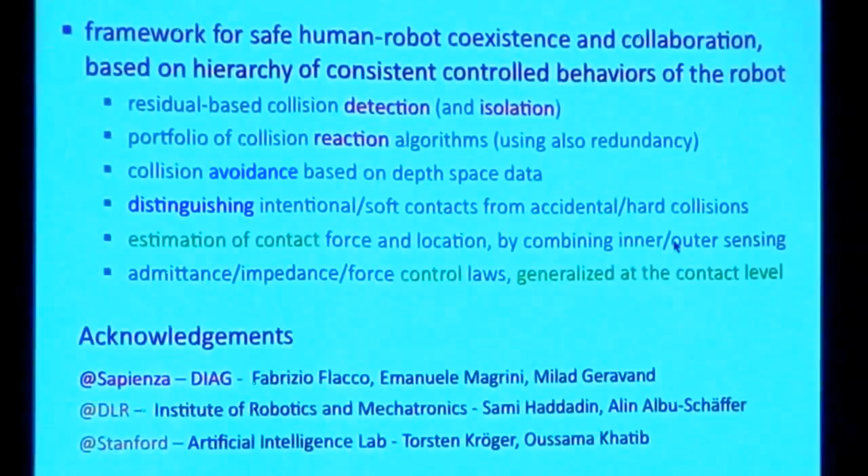And then, of course, Sami Haddadin and Alin Albu-Schäffer, where I spent one year in 2005, and also the Artificial Intelligence Lab, where Fabrizio spent some months during his PhD with Torsten Kröger and Oussama Khatib. Thank you very much.

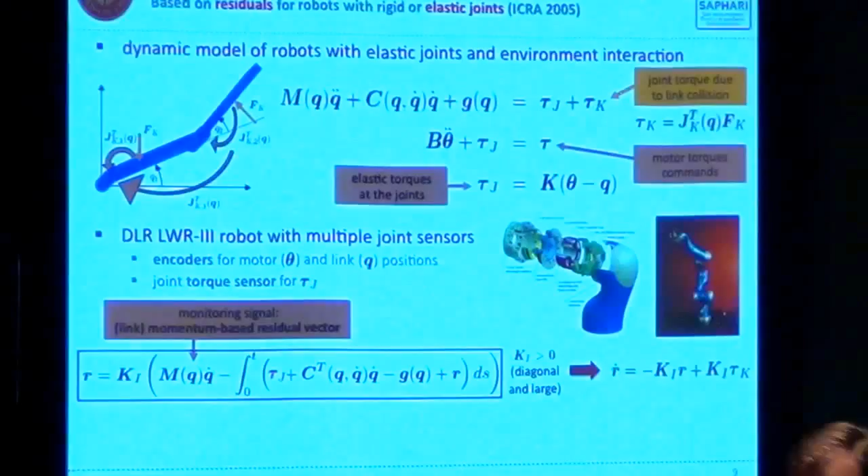Absolutely. But this idea is very useful because once you have understood what you're doing, for instance, for the joint elastic case, you can design such a residual for the collision on the link side and another residual on the motor side that you can use to detect other unknown torque, for instance the friction torque, without any model, and we have used this to compensate friction. You cannot do this if the joint is rigid, because otherwise you would have these two torques acting at the same level, okay?

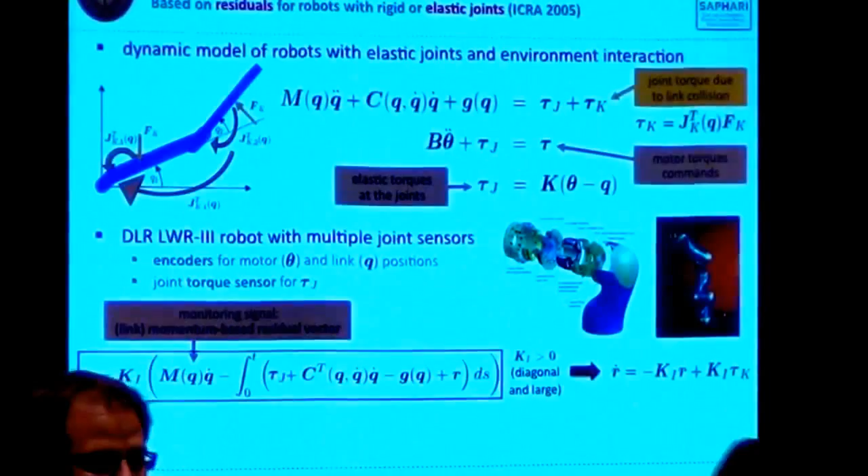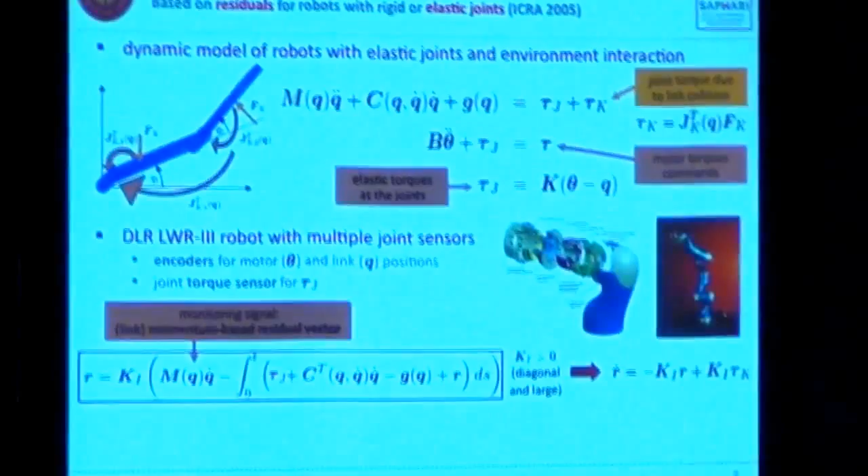And the same thing, we have implemented this for the variable stiffness case, and there are variants where, for instance, you don't need to know the current stiffness at all to have a detector for collision, and so on. Slight variations of the same concept. But this is a disturbance observer.